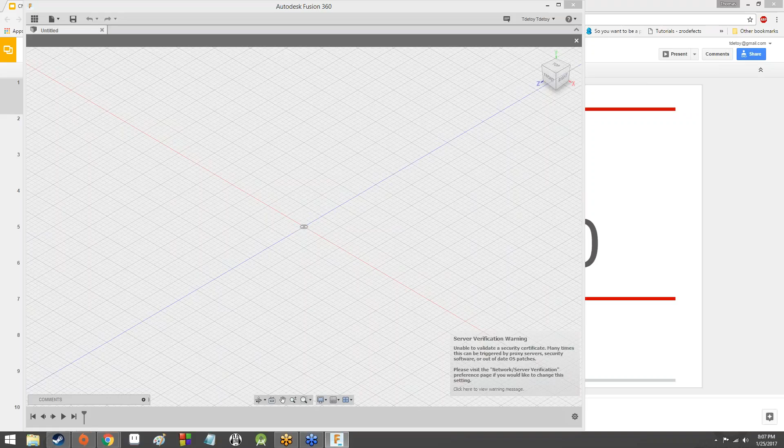Also, if we wanted to get into good computer practices, it's also generally good to basically do a clean install of your operating system on your computer. While we're on the subject of good computer practices that I don't generally follow, that's mostly because I use my computer every day, and I'm not really wild about being out of commission for that long. Especially because I do these classes with you guys, and if it means my computer's out of commission for a day and I don't know what's available and what's not, that can complicate things. But anyway, it's not a bad idea to do.

Okay, no updates due. Usually my Windows starts slowing down as well when there's an update for it. So let me go ahead and open up the bookshelf that we've been working on, and we're going to make that update, we're going to fix it, we're going to make sure that it's up to spec. So what I'm going to do is go to Modify and then Change Parameters.

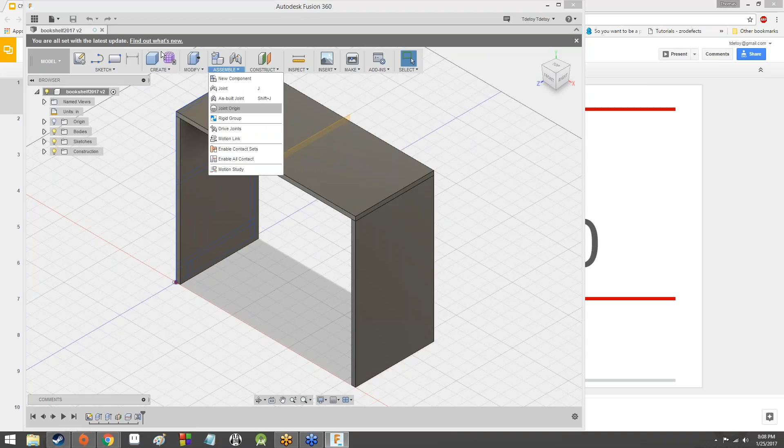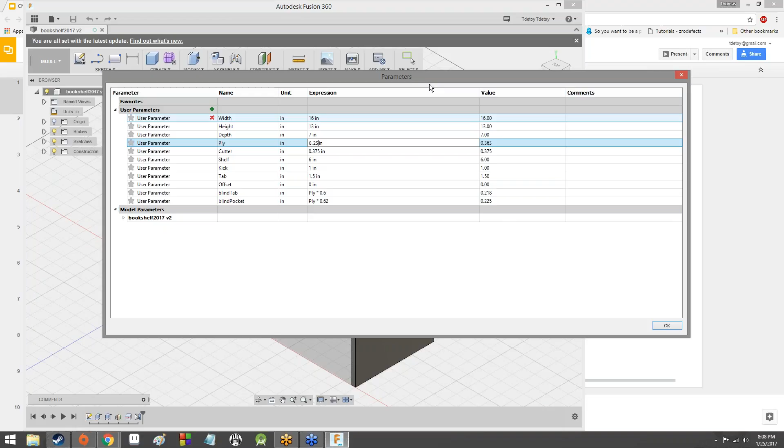What we're actually going to do is update the ply parameter, because we want this to be something more traditional, a more traditional size that you'll find at like the hardware store, right? So we'll change it to 0.25 inches, a quarter of an inch. Now by doing this, we're not only going to update our ply, we're also going to update our blind tab and our blind pocket. You'll see those update as well. On top of that, let me go ahead and hit enter and watch the 3D model update in the background.

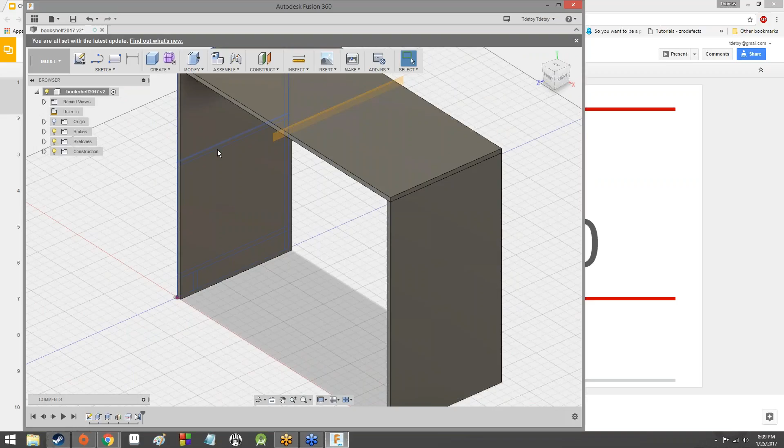All of the bits got thinner because it automatically updated all of our ply user presets when we changed that. So our bookcase now actually looks different. In addition, the sketches, the rectangles that we drew, those are going to be different as well. Pretty handy, right? You can see why using user presets for things that are going to be used frequently across your model might be a good idea. Because if you get something like the ply wrong, hypothetically, you can update that in the user presets.

Now it looks like Autodesk Fusion actually downloaded a new update, which is part of the reason why it took so long to open up that time.

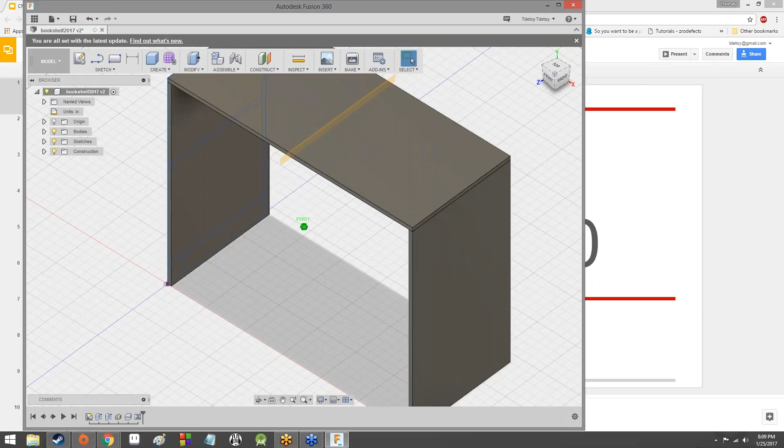Now up here you can see that there are axes tied to the model rotate viewer, so now we can very clearly tell which one's the Z, which one's the X, and which one is the Y axis, which is nice. I like that.

Your thing looks completely wrong. Can you elaborate? Did it happen after you changed the ply or when you opened it? What changed when you changed the ply?

Okay, what did you change ply to? Double check your ply value. Make sure it's 0.25 inches.

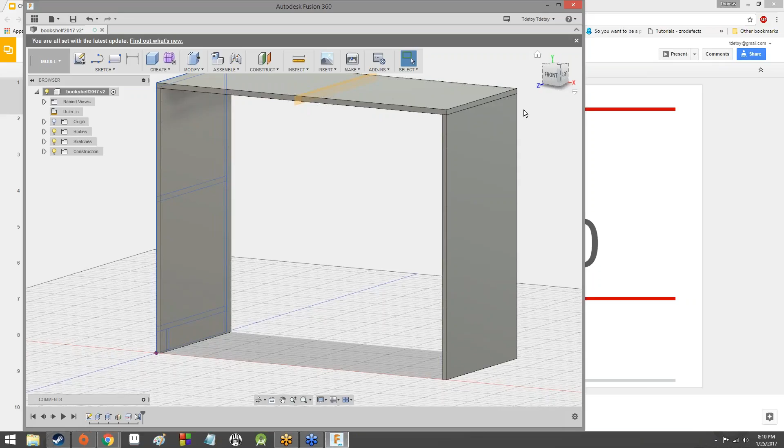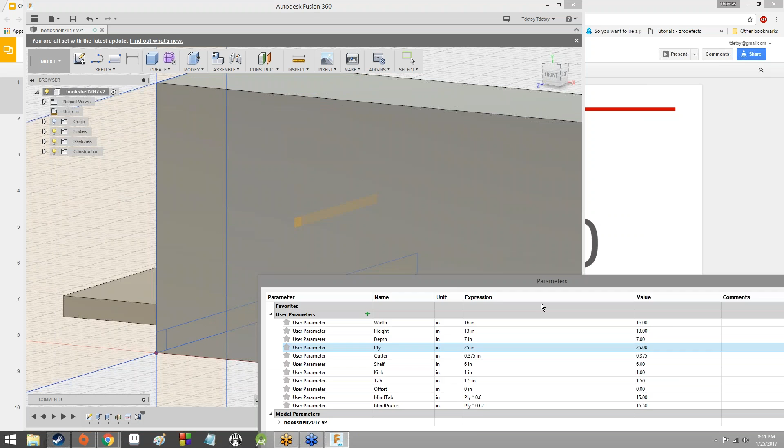Because changing ply in and of itself, like if it's 25, that would definitely turn it into this weird block thing. But 0.25, specifically typing the 0.25, that comes out okay. So can you verify that it's 0.25 and not 25 inches?

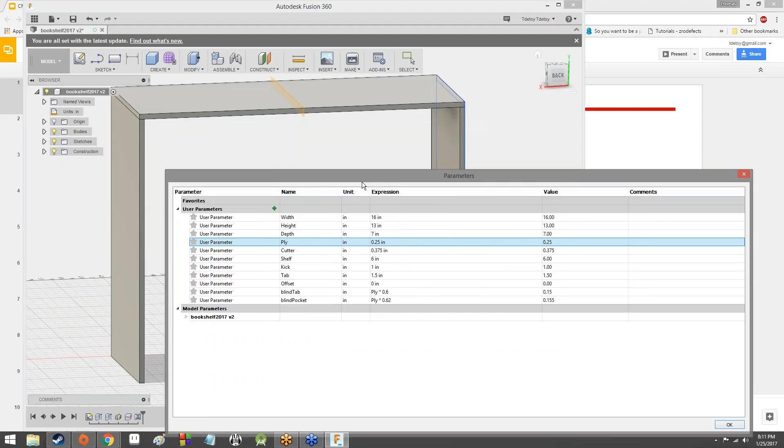I would have to, unfortunately, take a look at it. We don't really have the time for that right now.

So just return the ply back to what it was. You can do that with an undo. Just hit undo until you've got the bookcase looking back sane. And then we'll continue, and it went back to normal.

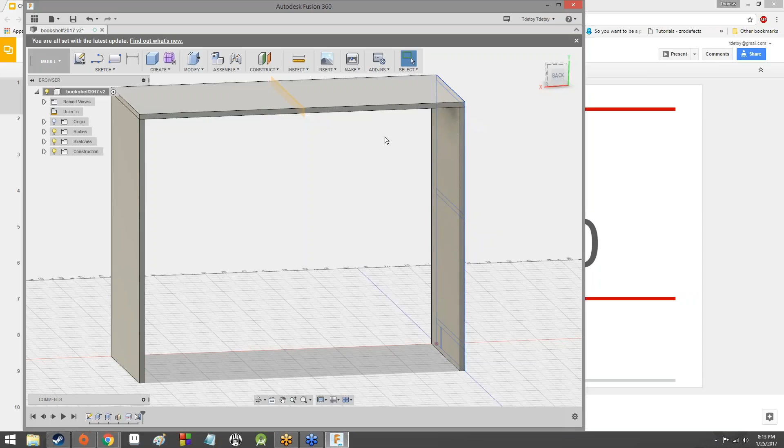Did the bookcase return to what it looked like before, which was more like a bookcase? Okay, good. So we'll continue with designing the bookcase as it is, and then we can maybe take a look at that after class and figure out what exactly was bugging out when you changed that. But for now, let's make some more progress on building this thing.

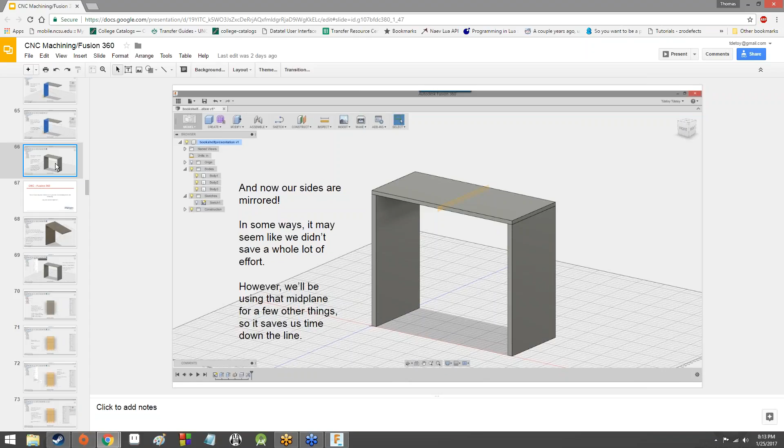So we got this far, obviously, as you all can tell by looking at your bookcase. We got two sidewalls on it, we got a top on it, but we want to get those shelves back in there. But we can't do that with the sketch oriented the way it is, because we can't extrude through already existing material, which complicates things, naturally.

So what we're going to do is we're actually going to create a new sketch and basically just kind of draw over the old sketch, in essence. So let's go ahead and do that.

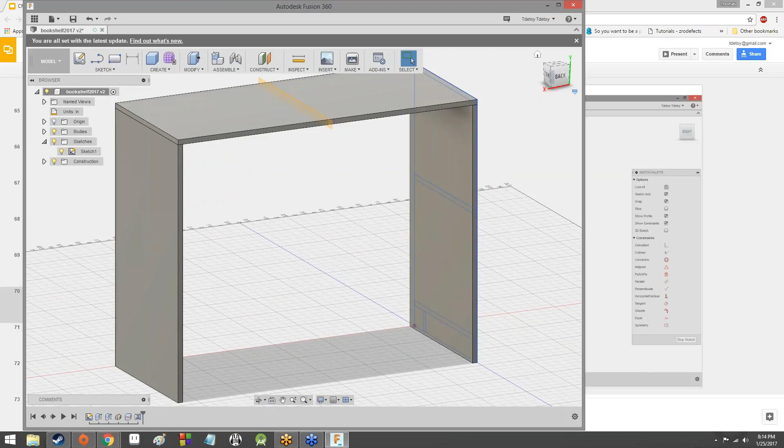So sketch one is on this particular wall, right? It looks like it's the left wall. Yeah, it's the left wall. So what I'm going to do is go under sketch and create a new sketch, and it's going to ask me where I want to place it. I'm going to place it on the inside part of the left wall. As you can see, I've got my sketch here on the outside part of the left wall. I'm going to click on the inside part of the left wall, and it's going to realign everything. And we're looking at stuff that doesn't really make any sense.

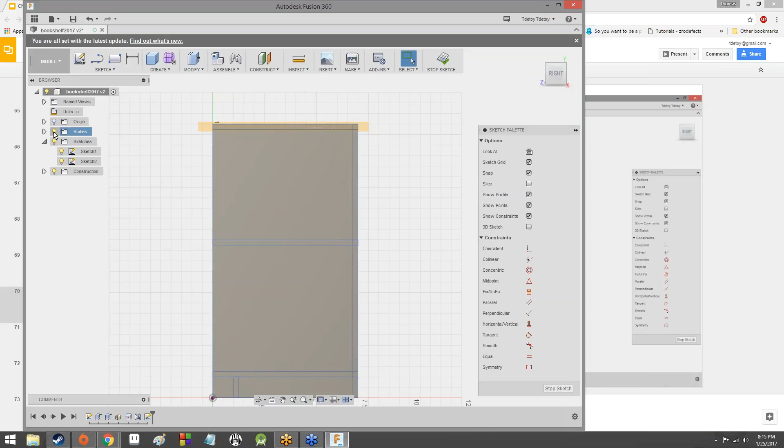But we're going to make sure that it makes sense. So what I'm going to do is click the little light bulb next to bodies in order to hide all of them. So now we should just be looking at our two sketches, sketch one and sketch two. If I hide sketch one, it's gone, but I do want it there. So we're going to make sure that we unhide sketch one so that it's visible. The only thing that should be visible right now are our two sketches. I'm actually going to hide the construction as well. You don't need to do it, but I'm going to do it. So now we've got sketch one and sketch two visible and nothing else.

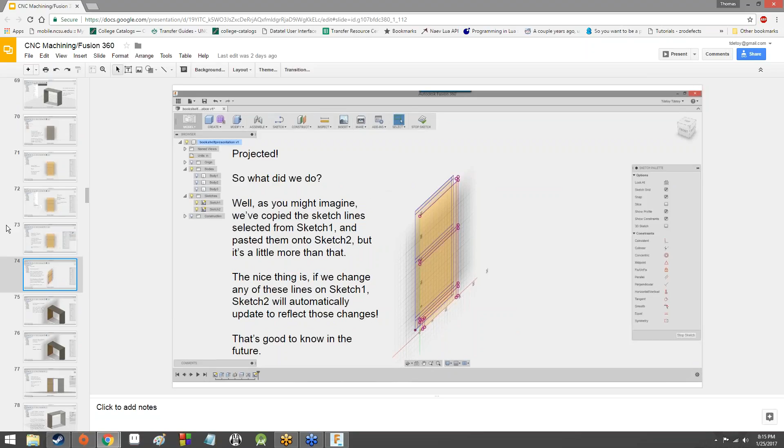So now what we're going to do is project, and this is going to be different from a regular copy and paste. I'm going to go up to Sketch, and then Project/Include, and then Project. As you can see, when I mouse over it, I get this tooltip that says it projects the body, silhouette, edges, work geometries, and sketch curves into the active sketch plane. Use a selection filter to project specific types of geometry, or the body silhouette.

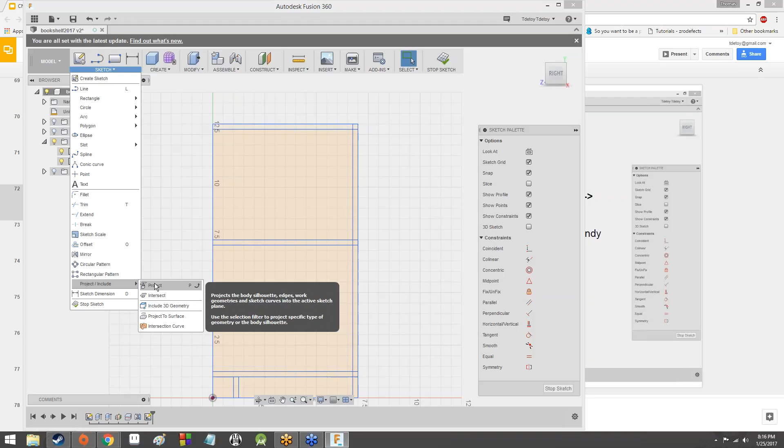So we're going to hit Project. As you can see here, we've got geometry select and selection filters, either specified entities or bodies. We're going to keep it on specified entities.

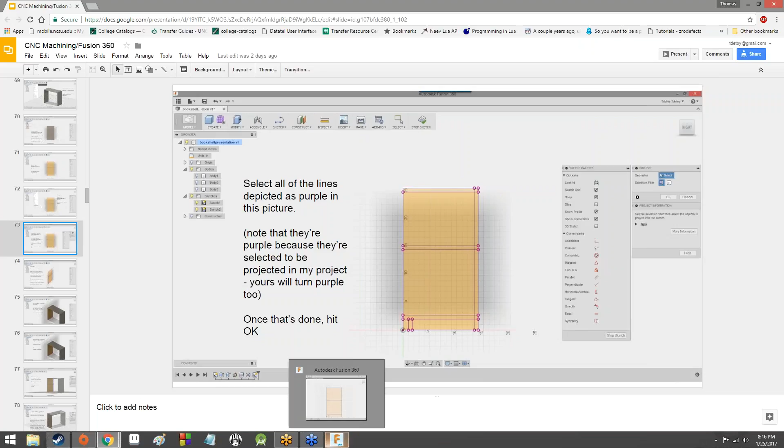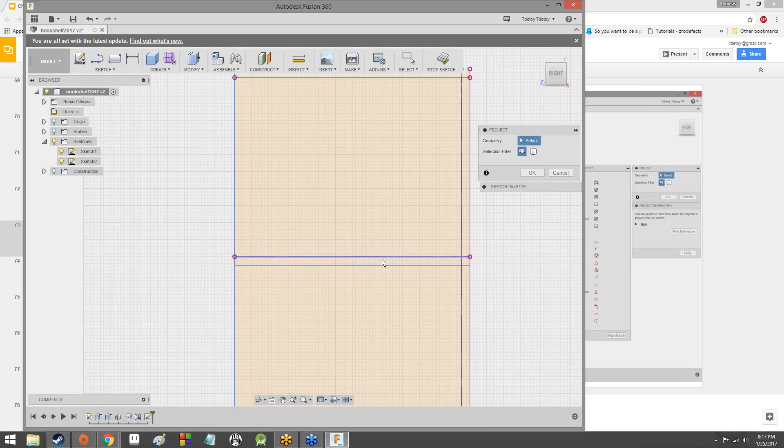And we're basically just going to click a whole bunch of the lines in Sketch 1. Let me figure out exactly which ones. I'm going to zoom in so you can see this more easily, and hide the sketch palette window, putting it underneath. I'm going to select the bottom part of the top rectangle, not the top of the big rectangle. I'm going to select the two vertical rectangles on the side, these two in the middle, these two down here, these two on this vertical one. And that should be all the ones you want to select.

So as you can see here, I've got the bottom line of the top rectangle, the two lines that make up the vertical rectangle, the two lines that make up the middle rectangle, the two lines that make up the bottom rectangle, and the two lines that make up the bottom vertical rectangle. So all in all, that's 1, 2, 3, 4, 5, 6, 7, 8, 9 lines selected.

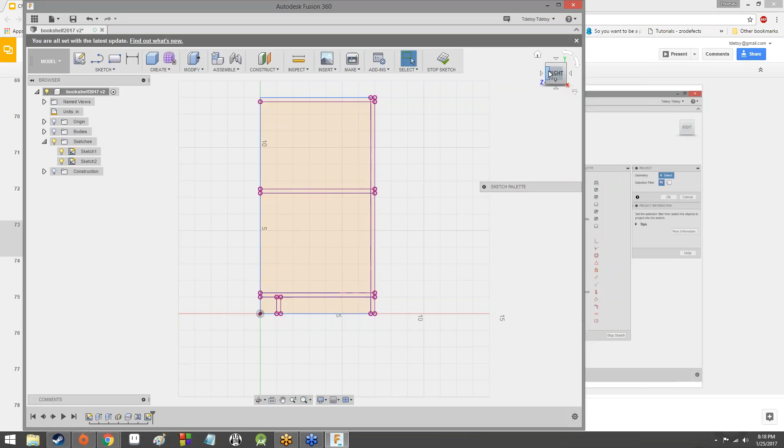And nothing's changed, except things have changed. Let me rotate my view. And as you can see, Sketch 2 now has these lines sort of hovering over Sketch 1. What we've essentially done is we've copy-pasted, except it's more useful than that, because if we update anything on Sketch 1, Sketch 2 will automatically update to mimic it. So it's more than a copy-paste.

Think about it like if you type something up and then copy and paste it into a new document. You're copying and pasting that bit of text as it exists at that point in time. If you continue working on your original text and want to change something about that part you copy-pasted, you'll have to copy and paste it again to reflect that update. Now imagine doing something like Project, where it's like a copy-paste, but whenever you update the original text, the copied text automatically updates to reflect that too. So it's like a copy-paste, but more powerful and versatile, which is useful for us right now because if we change anything, everything else will update to reflect that, which will be excellent.

So cool, that's done. Now that we've updated our sketch, let me hide Sketch 1 and bring all of our bodies back. Just like before, by clicking the light bulbs, I'm going to bring the construction back as well, even though it's not strictly necessary at this point.

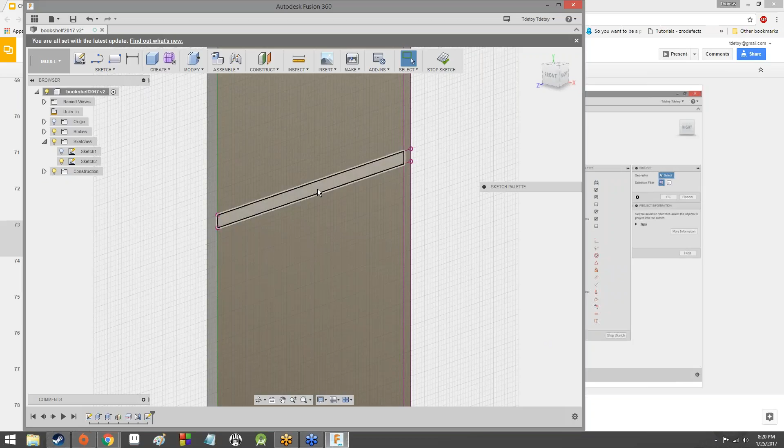So we should see a bit of sketching projected onto the inside wall, or the inside of the left wall, on our bookshelf.

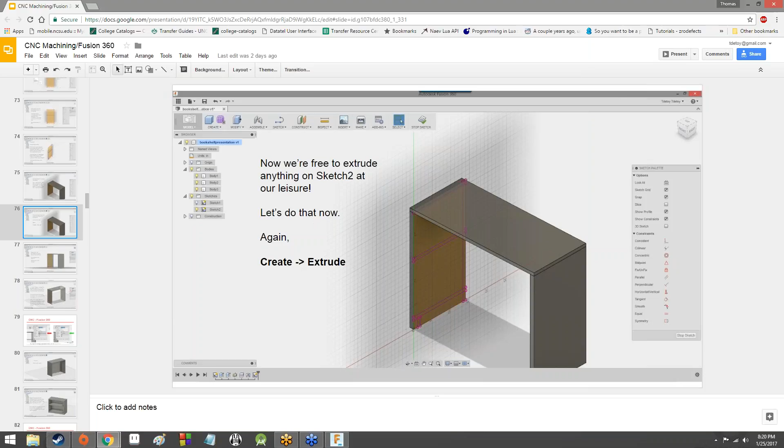Once we've done that, let's go ahead and create the inside of our bookshelf. I'll go to Create and then Extrude. What we're going to do is project the back of the bookcase, or extrude the back of the bookcase. I'm going to click all of these vertical rectangles along the back end from top to bottom. You can see it running all along the back of the bookcase.

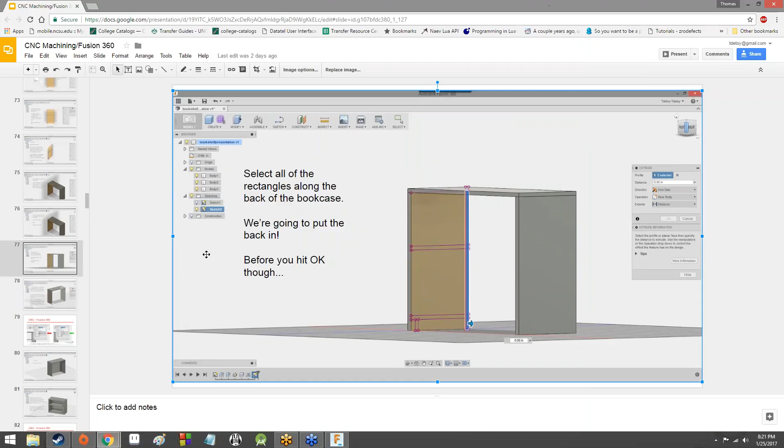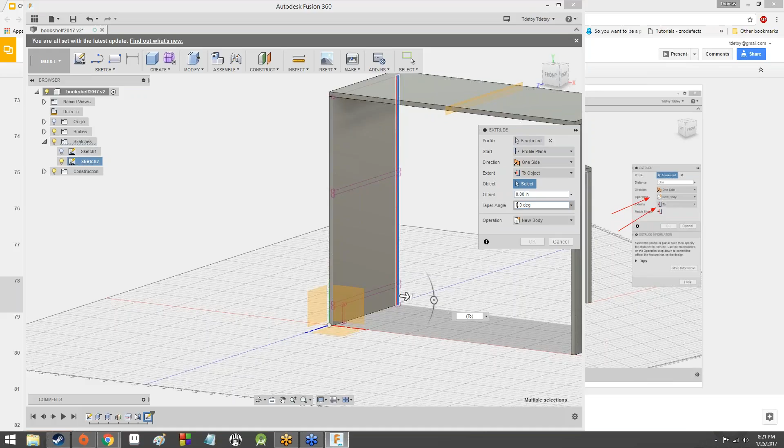We're going to do some things a little differently. Before, with distance, we entered a discrete value. Instead, we're going to change this. Under extent, we're going to change it to ToObject, and then select this object on the opposite side.

It will automatically project across the back. Now hold on, we're not quite done yet. Under Operation, it's going to change to Join after you do that. You want it to be New Body instead. It will update, and we can look at the back to see that this is an entirely separate entity from either the side walls or the top, which is exactly what we want.

It's going to be kind of difficult if... okay, yeah, let me go over it again.

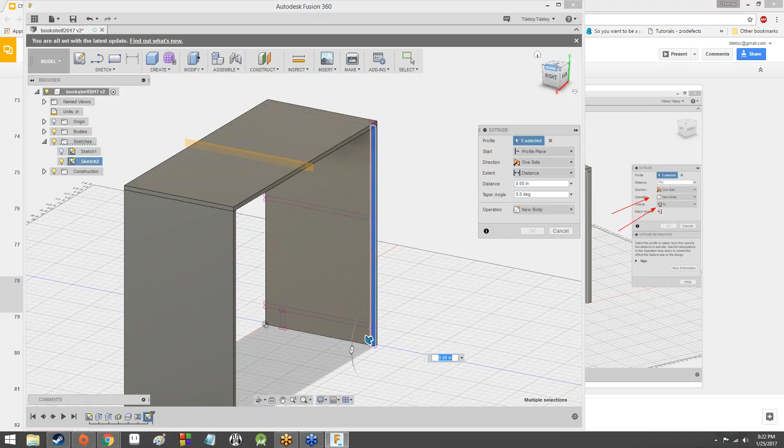So I'm going to go to Create and then Extrude, and select all of these back rectangles. Instead of entering a distance manually, forget that exists. We want the option under extent. I'm going to click on that. As you can see, we've got distance, to object, and all. I want to object, so I'll click that.

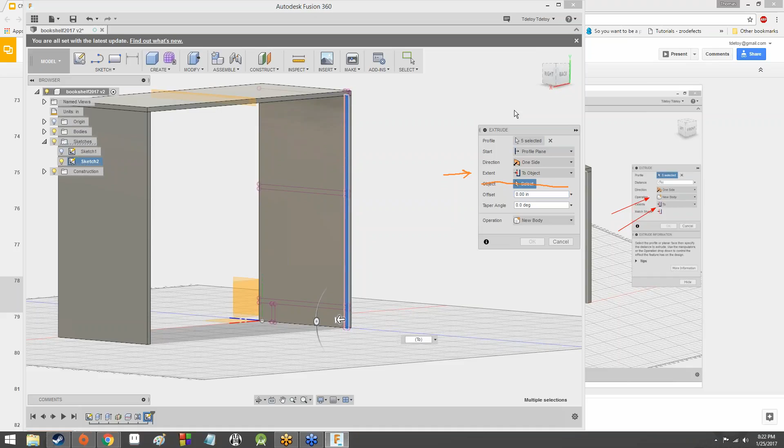It's going to ask where I want to project it to, right here under object. See how it's selected right now? So I'm going to rotate it around and select the opposite wall, and it's going to project or extrude it over to that opposite wall, which is perfect.

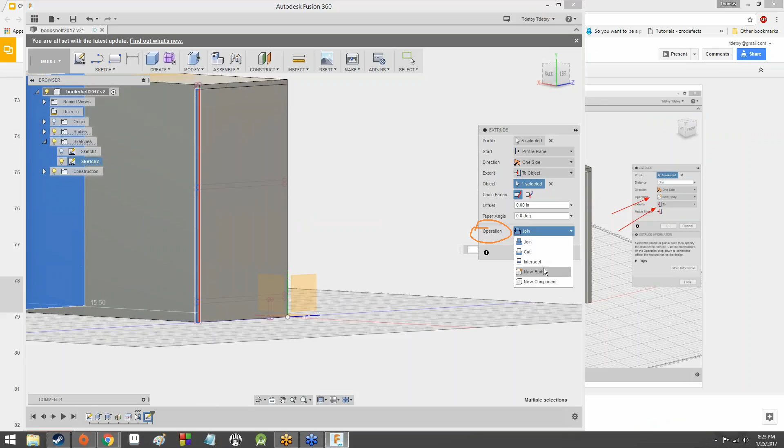Except once we've done that, we have one more thing. Operation down here gets updated with this Join. We don't want that. We want to change it to New Body. As you can see, everything updates to reflect that. Now we've got an entirely new body along the back of the bookcase, which is exactly what we want.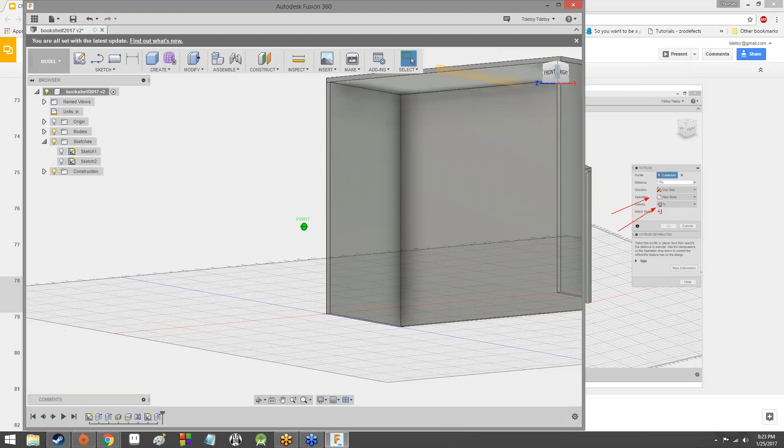Once that's all done, I'm going to hit OK. As you can see, we've got a new bit along the back, a separate body from the top or the side walls.

Hold on, let me do it one more time, because you don't want to actually type anything in there. Let me go to Create and Extrude, select all the back.

See, we don't want anything in distance. We change extent to object, and then click on the opposite wall, and it will automatically fill in the back for us. It will automatically extrude to this other wall. Then again, change it to New Body, and it should automatically create that entire back end for us.

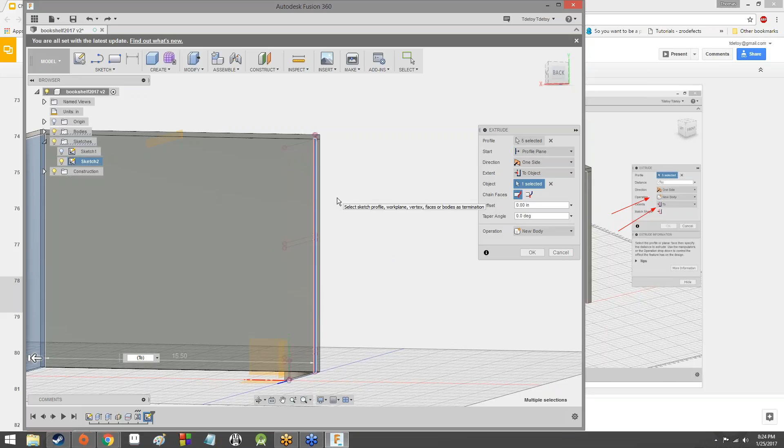This is for somebody else's benefit, Matteo. This is not... I know you've got it. So does that make sense to you? You got that?

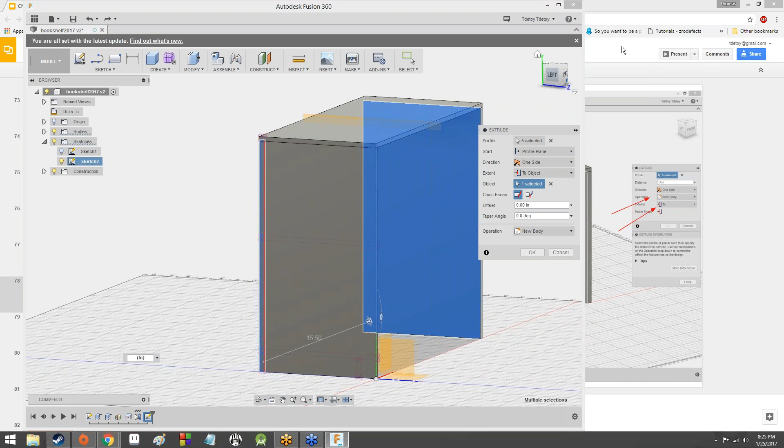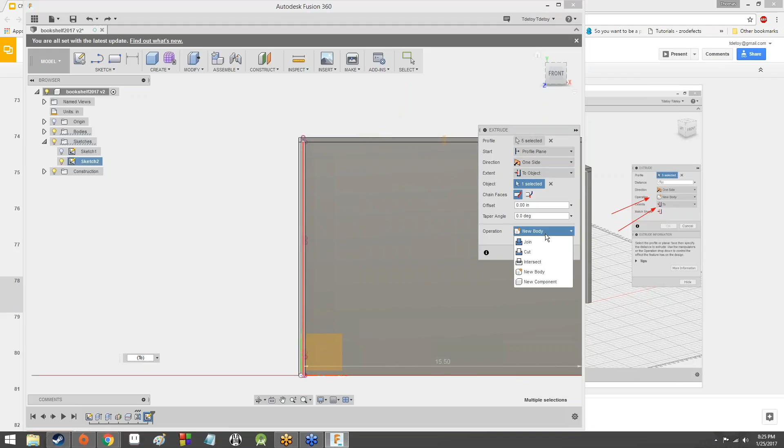Tool body creation failed. You shouldn't be using a tool body. That's odd. Tool body creation failed. You're using the extrude tool, right? Why is it asking for a tool body? That's bizarre.

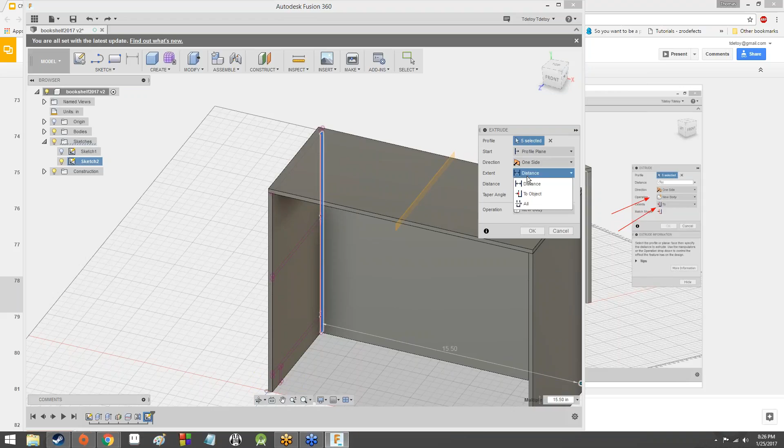Okay, well, this complicates things because we can't exactly continue without it. Yeah, the chain faces thing should just be default. You don't need to change that; you can try extended faces instead to see if that works out, but you shouldn't have to change that option at all.

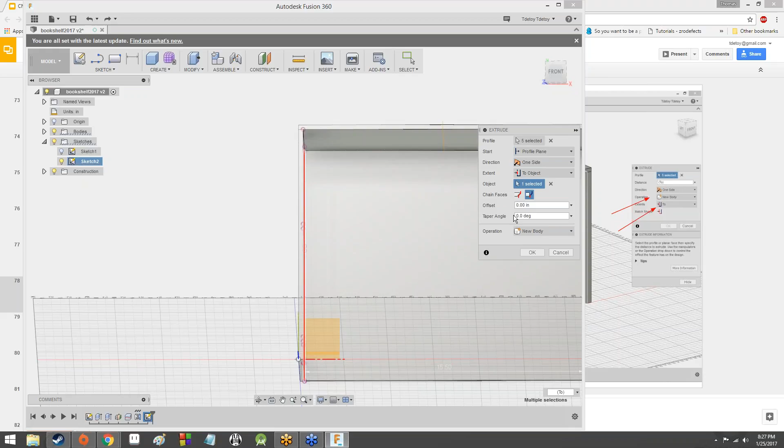Under operation, you have New Bodies. Oh, you have, okay, excellent. Cool. Perfect. All right. Yeah, sometimes it can be kind of finicky.

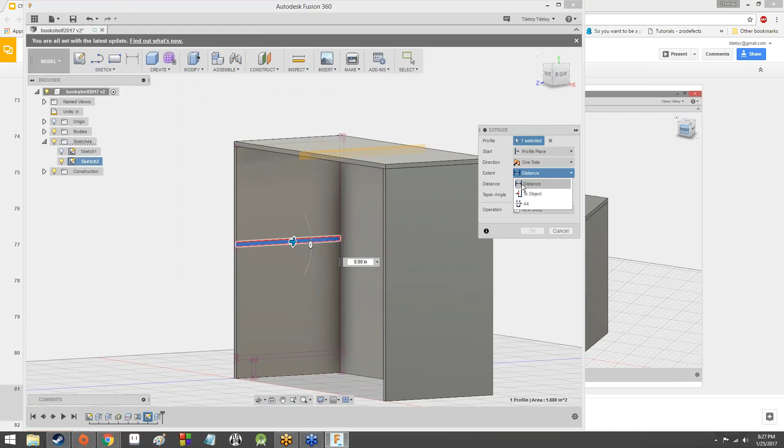So now we've got a back to the bookcase. We'll do the same thing to get shelves and a kick plate. Let me unhide sketch 2 so it's visible. Go to Create and Extrude, and now I'm going to click on this middle one. Again, I'm going to make it To Object, select it to the other side, and make sure it's a New Body. I'll hit OK, and now we have one shelf.

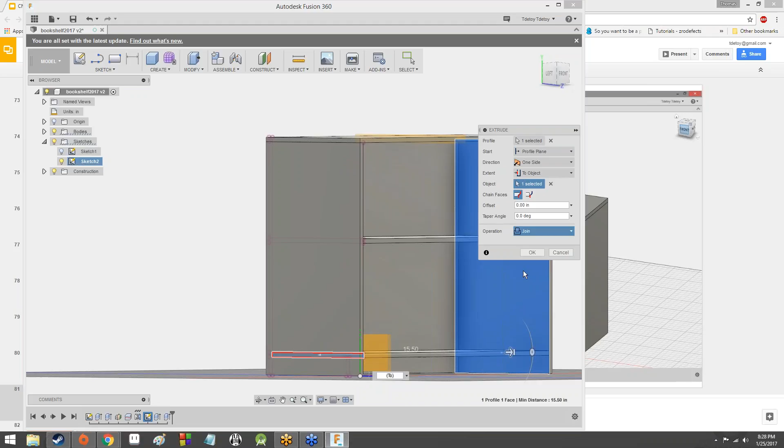Same deal down here: Create, Extrude, this bottom one. To Object, other side, New Body. OK. And finally, down here, Create, Extrude, the little vertical rectangle because that's going to be our kick plate. To Object, New Body. OK.

And now it's looking like a proper bookcase, huh? That's because that's what we modeled — a proper bookcase.

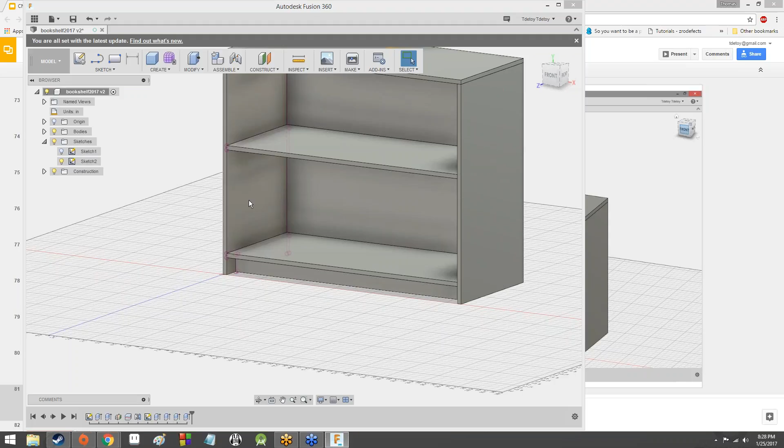Raise your hand once you've done all those things, once you've got your bookcase looking like this. All right, we got one hand up so far. Two hands. Another hand. Almost there, give it a couple more minutes.

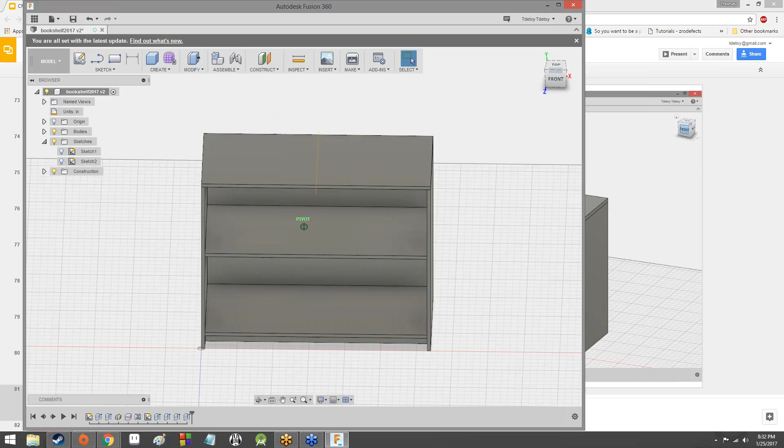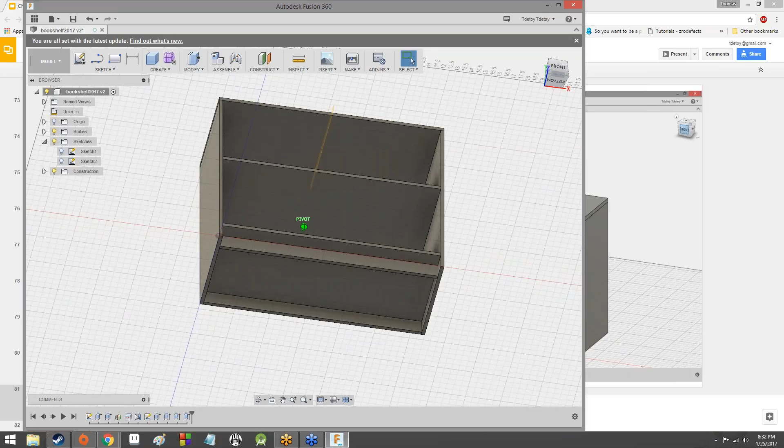We can move on to the next step. However, we're going to do something a little bit different with this. This bookcase is actually going to be constructed with tabs. So there's a little bit more work to be done, but it should hopefully be pretty useful information for if you were working on something like this in the future. We're gonna spend some time putting some tabs, modeling some tabs into this bookcase so that you would be able to construct it. It's sort of like a jigsaw puzzle.

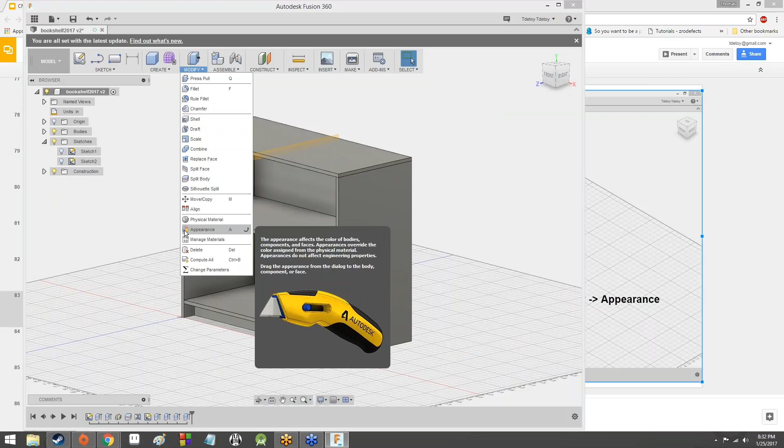Oh, also we could do this too. This isn't strictly speaking necessary, but we can go to modify and then appearance. And let's see here, go to solid woods, unfinished woods, and do something like cherry and drag it on.

And of course it doesn't want to cooperate. Let's try. Hello? Why won't you? It doesn't actually want to apply it. Odd. Normally you should just be able to click and drag. And, oh, let's try this. Yep, that's why.

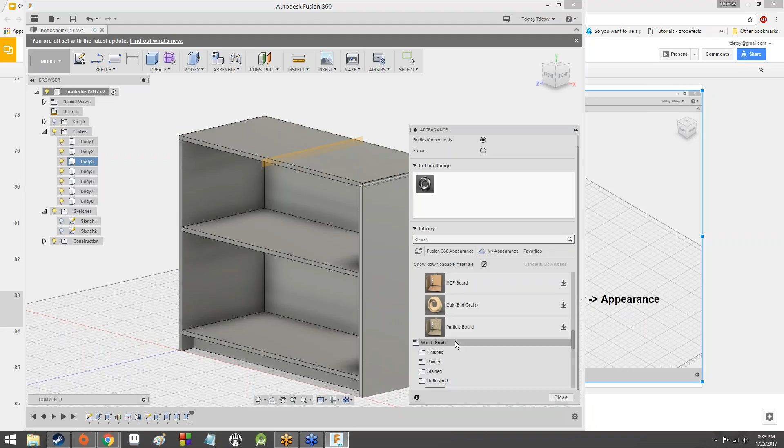We'll do walnut. This is under modify and then appearance. Or pine. Let's do pine. Pine is nice and light colored. Pine and pine and pine. Oop, that's got to be pine in the back. Pine and pine and pine and pine and just one more time, pine. And now it actually looks like it's made out of wood, unfinished wood.

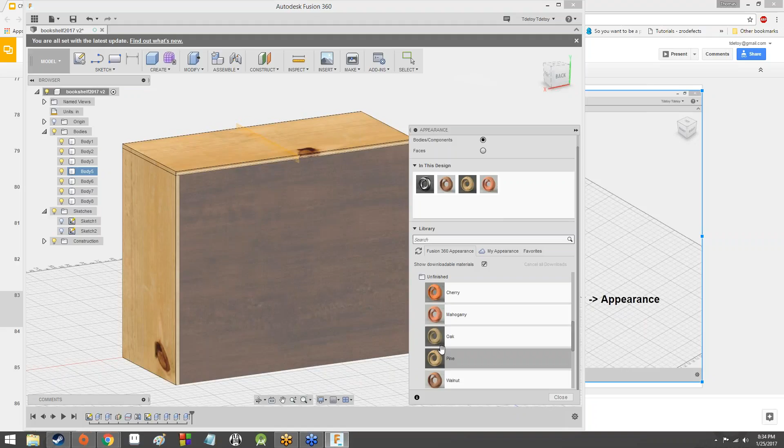Make it look like it's made out of particle board if we were so inclined, or MDF, or mahogany. Make sure you're selecting an option from the wood category and not the wood solid, because the wood solid will not work, and it's kind of finicky about it too. Like you can't use glossy finished ash.

Oh yeah. Oh, you actually have ash under yours. Oh, yours worked with the solid? Yeah, because it's not - ash does not work for me. Interestingly enough.

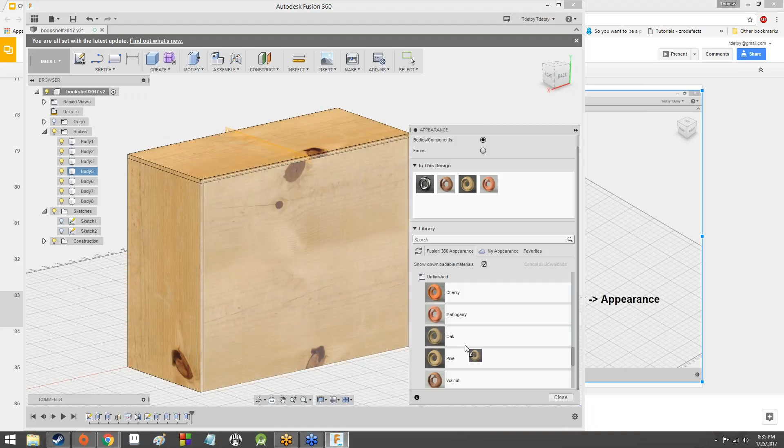I'm not going to do that in the middle of the class. Yeah, I mean, that's the plan, but yeah.

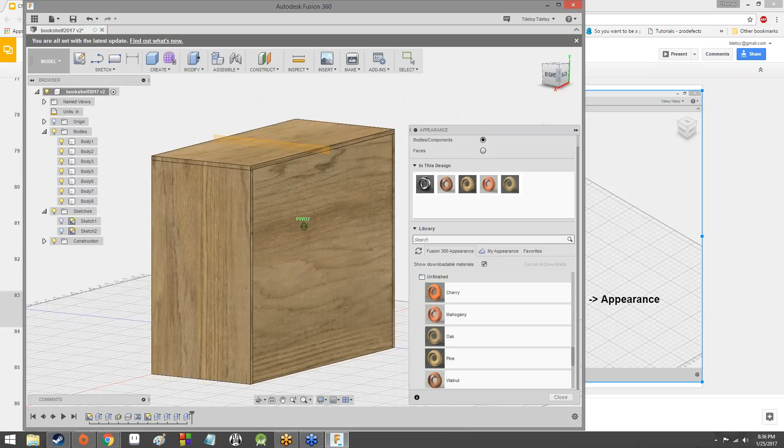But yeah, so you can apply basically a wood texture to it, which again is just a visual aid. It's not really something that's going to affect the end product one way or another, but it is something that's nice to have, so you can look at it and be like, yeah, this is what the end result could maybe potentially look like.

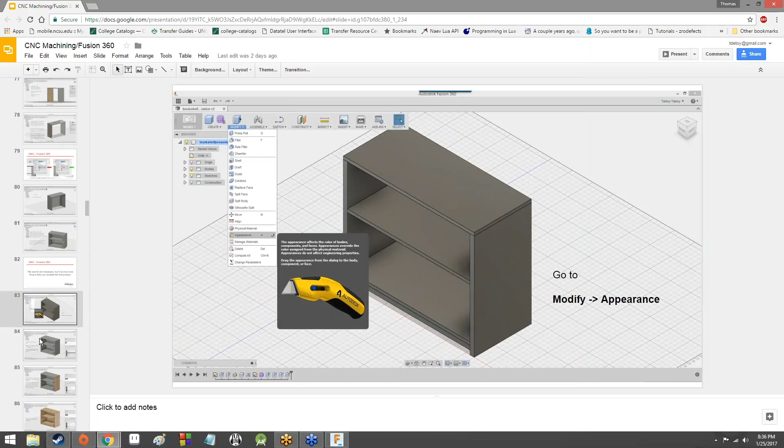But moving on, let's actually do some useful stuff. We're actually going to get it ready for assembly, like I said, because it's going to be kind of like a jigsaw puzzle. But it requires a few more things on the model that we need to add.

We're going to start on this with the kickplate. And actually, before we do that, let's go ahead and rename everything. You can do that by just double-clicking on the text next to the body. As you can see, I've listed all the bodies here. If I mouse over it, it highlights it in blue, letting me know which body I'm looking at.

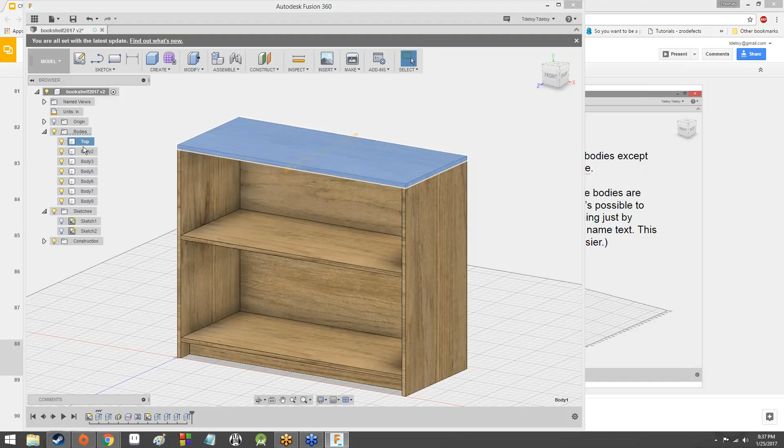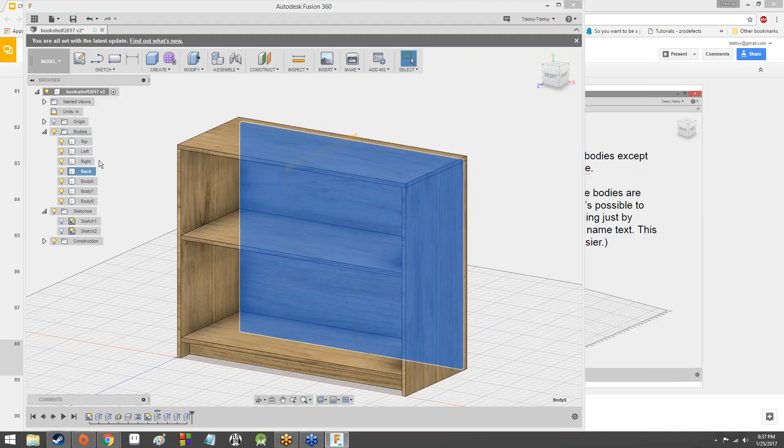So we're going to label this one top, because this is the top of the bookcase. Body 2 is the left wall, so this is going to be labeled left. Body 3 is the right wall, so this one's going to be labeled right. Oh, body 5 is the back wall, so this is going to be labeled back. This one's going to be labeled top shelf. This one's going to be labeled bottom shelf. And this one's going to be labeled kick.

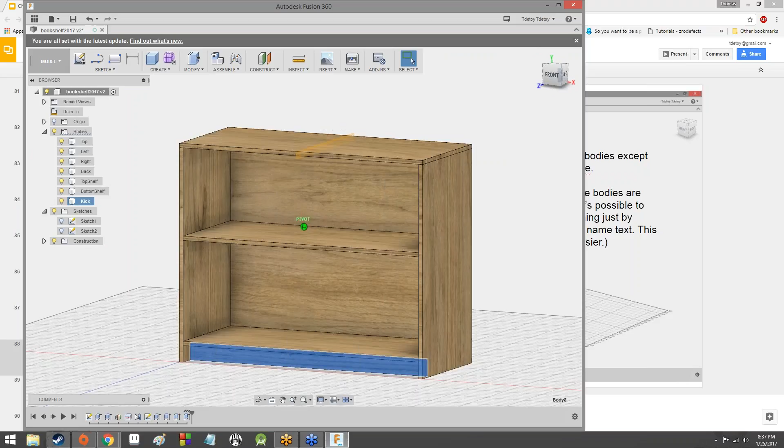Bam. And again, I just renamed them by double-clicking on the name of the body, just so I had something a little bit more useful to work with. Strictly speaking, though, not really necessary. However, what we are going to do right now, and what will be necessary, is we're going to hide all of the bodies by clicking on that.

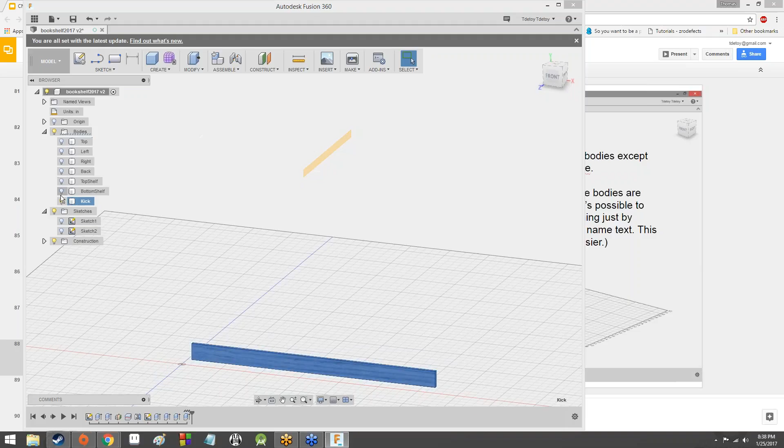And, well, actually, that's not really going to help. So I'm going to click on all the light bulbs next to - you only have 5 of them. Did you accidentally join the separate bodies instead of creating a new one each time you extruded?

Or, yeah, double check that. You want to make sure that these are all separate from one another, because otherwise it'll be a lot harder to manipulate them. We can cut them after the fact, but it'll honestly just be a lot easier to re-extrude.

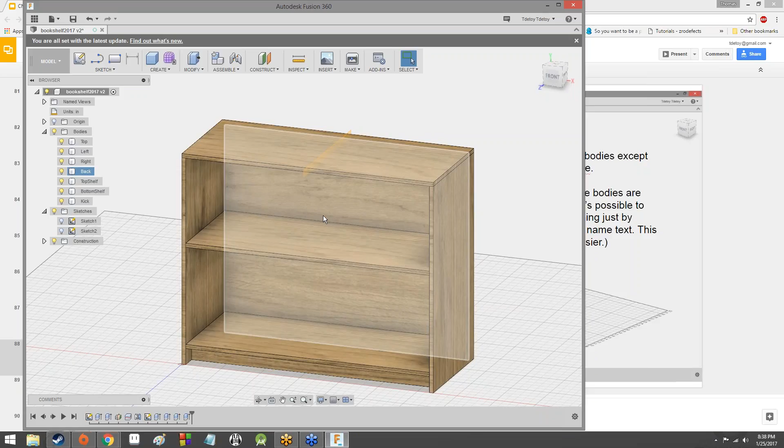But yeah, so for everybody else, hide everything except for the kick plate. So now I got the kick plate down here. Hey, look at the kick plate. Kick plate.

And what we're going to do is the same thing we've always done. Actually, we're going to create a new sketch and sketch some stuff onto it. So give everybody a moment. Double check and make sure you have a separate body for everything as well, for everybody else, just so we know we're all on the same page. If you do, raise your hand. If you don't, fix it so that you do, and raise your hand.

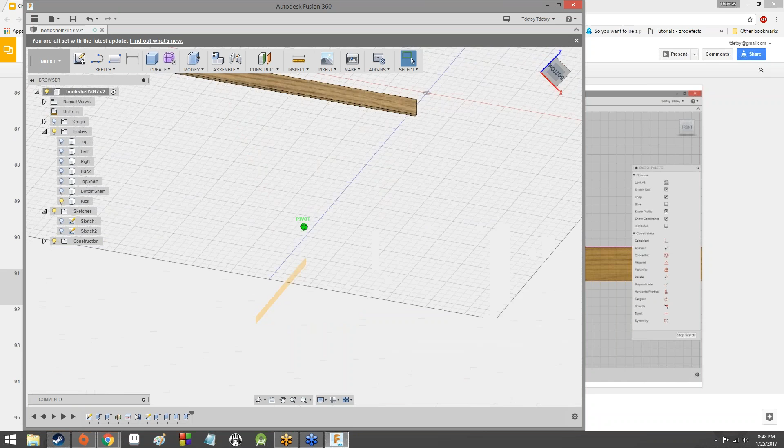How's everybody doing on re-extruding those so they're all separate bodies?

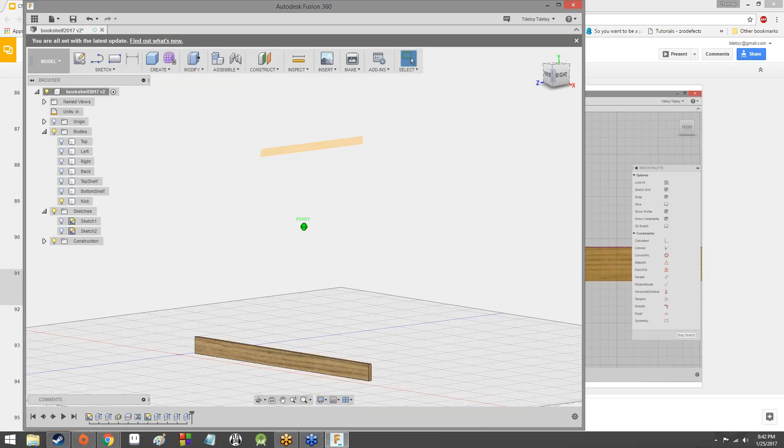All right. Okay. So let's see here. Let's go ahead. No, you don't have to. It's not necessary. It's just something that helps for visualization purposes, but it's really not necessary.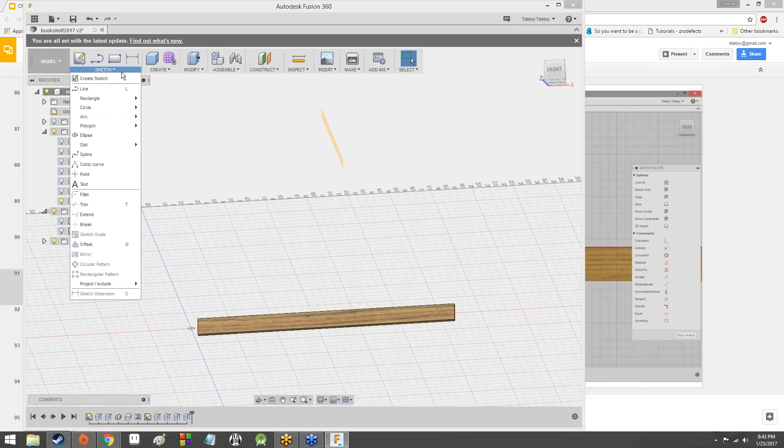So here is what we're going to do. I'm going to create a new sketch, and I'm going to create this sketch on the front of the kick plate. Now notice how there is a plane you can set it to, and that sort of overlaps the kick plate. Make sure not to select that one. You want the front of the kick plate, not the same plane as the kick plate.

Wood. I don't know what type or anything like that, but yeah, presumably. Maybe pine. It's usually pretty easy. But yeah, so select the front of the kick plate.

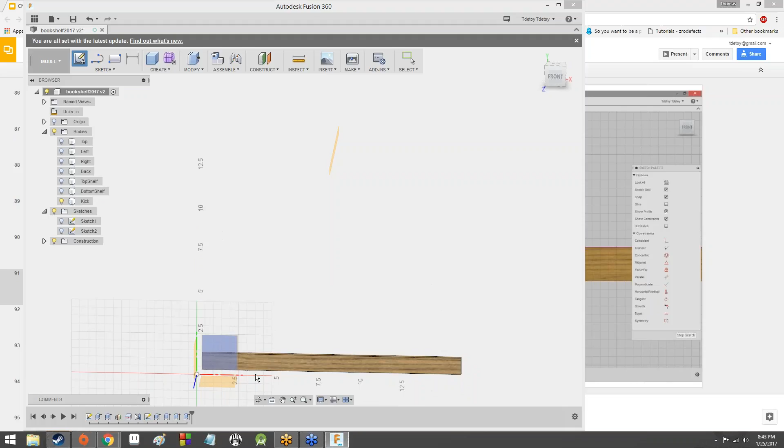You want to make sure that it's that one, and it's going to realign so that we're looking at the front of the kick plate. Yes, you are going to create a new sketch. Once we've done that, we should be looking at the front of the kick plate.

So I'm going to go ahead and do a couple of 2-point rectangles and just slap them onto the kick plate, one on the side and one on the top. Again, you don't have to worry about where, you don't have to worry about how big. You just want to make sure that you have 2 rectangles, one on the side and one on the top. That is ultimately what we're more concerned with.

Do you remember how you created rectangles in the past on a sketch? Oh yeah, Mateo's got it. You would do the 2-point rectangle. So you can go down to sketch and rectangle and 2-point rectangle, and then draw them, and then you'll have your 2 rectangles.

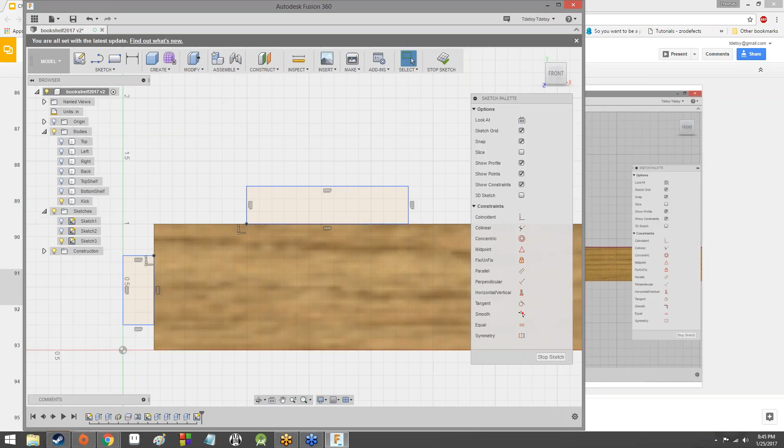So once we've gotten that, we're actually going to dimension these out a little bit. So we'll go to sketch dimension, bam, and let's dimension these individual bits. So I'm going to dimension the top part of this new rectangle that I drew, and I'm going to set it equal to ply. You want that to be ply because that is going to be the same as the thickness of the wood. Based on that, what do you think we're making? Just educated guess.

Well, these are tabs that are going to be used to construct the bookcase with. But yeah, so next I wanted to dimension...

Let's dimension this right here. So if I mouse over the leftmost line on this side rectangle and bring it out, we can actually use equations to represent dimensions as well. So what I'm going to make this is kick divided by, using a /3. And what that's going to do is it's going to resize it so it's 1/3 the height of this kick plate, so 1/3 of an inch.

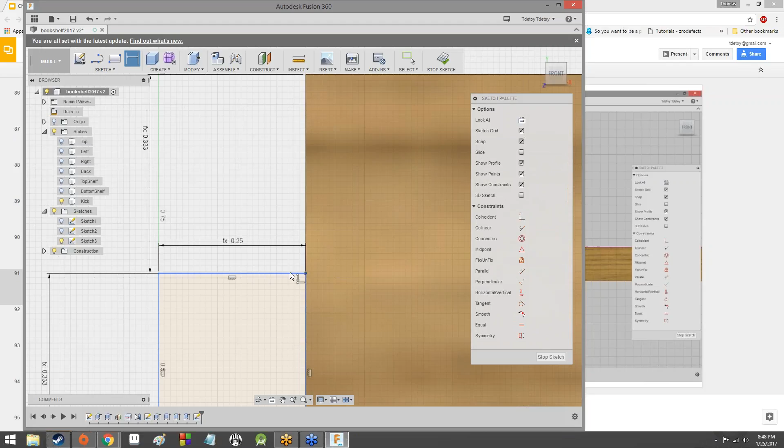So, the width of this side tab has been set to kick divided by 3. The length of this side tab has been set to ply, and the distance between the top of the side tab and the top of the kick plate has been set to kick divided by 3. So now we've got a third of the kick plate height here, a third here, and a third here. This is one of our tabs.

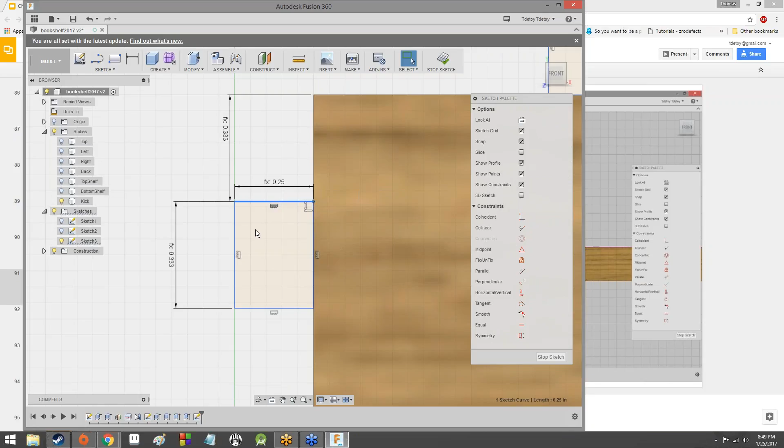Next, hopefully you'll be able to do this. Just one more time: this dimension right here is ply. This dimension right here is kick divided by 3. The distance between this and this is also kick divided by 3.

Notice we don't have to do this last one because it's assumed that that is also going to be kick divided by 3. If you've dimensioned out 2 of the 3 dimensions, it's assumed that the last third is that bit down there.

Do they have to be centered? What do you mean, Cone? Nice, Mateo.

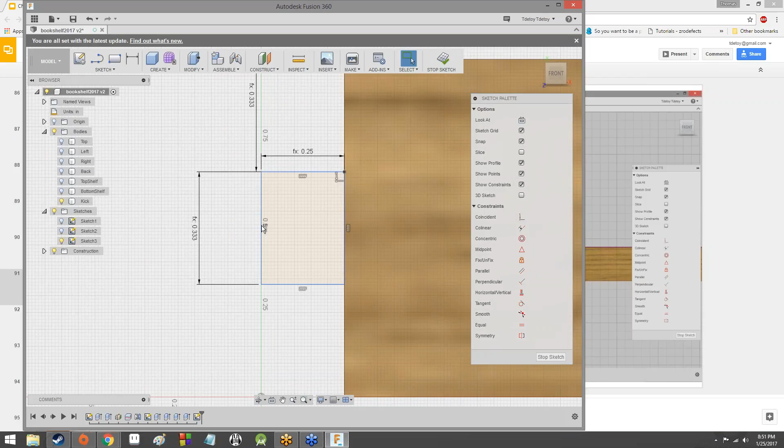Make sure you're dimensioning the correct things. I dimensioned where the tab will intersect with the kick plate and the top corner of the kick plate, and made that kick divided by 3 specifically. Then I dimensioned this top line right here, also kick divided by 3. That should fill in the blanks and make it automatically centered on the side of the kick plate.

We haven't done anything with this top tab yet, so that's just doing whatever it does. Don't worry about that right now. But for this one, it should be more or less centered on the side. Obviously, dividing 1 by 3 doesn't divide nicely as far as computers are concerned, but it should visually at least look like it's in the middle of the side.

Okay, do you have this area dimensioned out up here, the distance between these two? What is it? Just read the value to me. Okay, what about the width of that tab? What is that one?

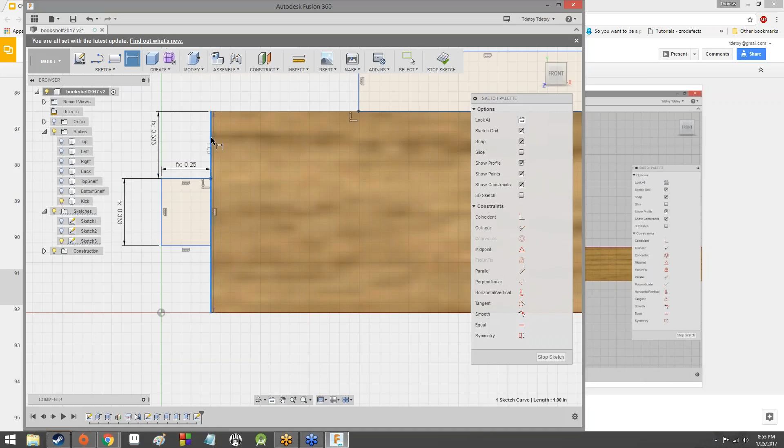If you were to basically sketch dimension and then just click on the side of the kick plate and bring out the cursor, you'll see a measurement that exists there. It'll be sort of grayed out, hovering next to your cursor. Can you tell me what that one is?

That's why. You did not dimension your kick plate to be kick in height. So why don't you go ahead and do that right now? Just dimension the side of the kick plate to be kick.

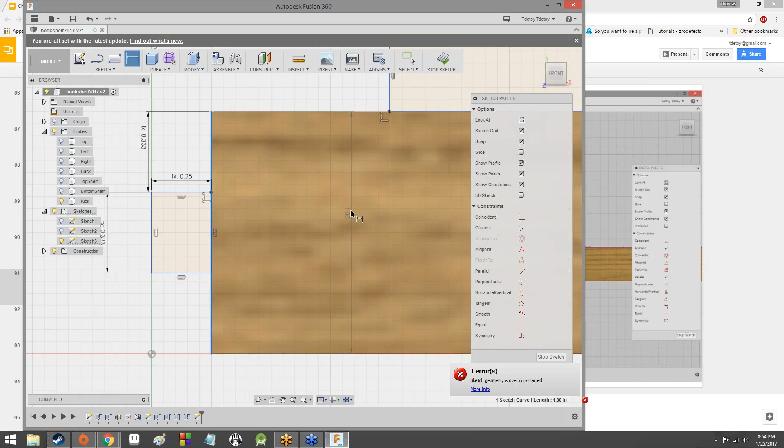And it should update and everything should look more centered. Hopefully it shouldn't intersect with the shelf, but...

Is it giving you a reason, or is it just not allowing you to click? Okay, something else is dimensioned out, or it's intersecting with the other shelf and not happy about that.

You might have to redimension the original sketch and then re-extrude. Basically undo to that point. It's annoying, I know, but at the very least you'll have to redimension the original sketch. Hopefully it will update all the extrusions to reflect that, but you'll definitely have to redimension sketch one and figure out if there's an extra constraint there.